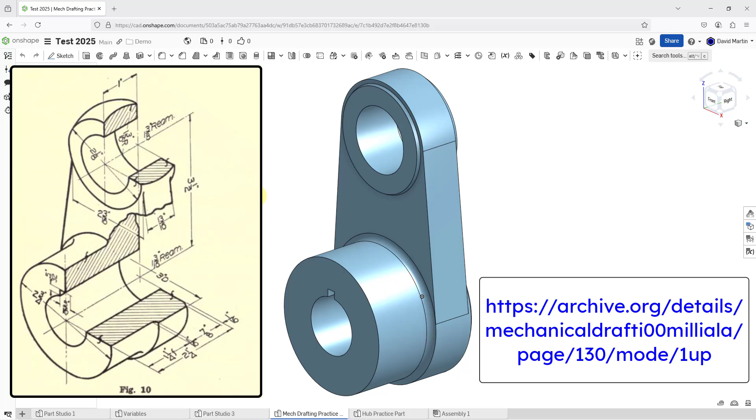Let's take a look at another example of a practice part in Onshape. This one also comes from Mechanical Drafting by Henry Willard Miller, a book written about 1917. It's a little bit more complicated than the previous part that I did. I'm going to do this in two separate videos. I think it'll be pretty long if I do it in one video, and I want to keep this bite-sized and digestible. So anyhow, I'm going to create this part, and I'm just going to work on the two revolve portions in this video.

Let me go back to my Onshape. Let me go to the folder where I want to create it. Let's hit the create button and then document. And this one, I'm going to call this, I don't know, some kind of piston linkage maybe. If you have a better description, please let me know. So I will create the document.

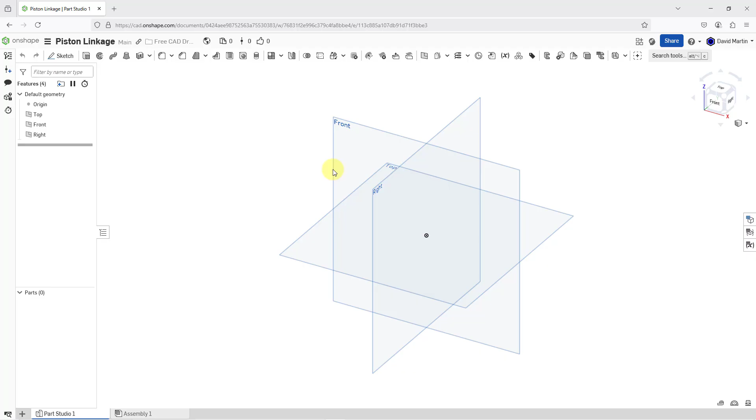And now the first thing I'm going to do is change my units. I'll go to the hamburger and then workspace units and make sure that I am doing this in inches and then hit the green check mark. Okay, and I'm going to do the first sketch for the bottom portion on the plane called right. So let's select right and then hold down the right mouse button and create a new sketch. I always like to view normal to the sketch, which I can get to from the right mouse button.

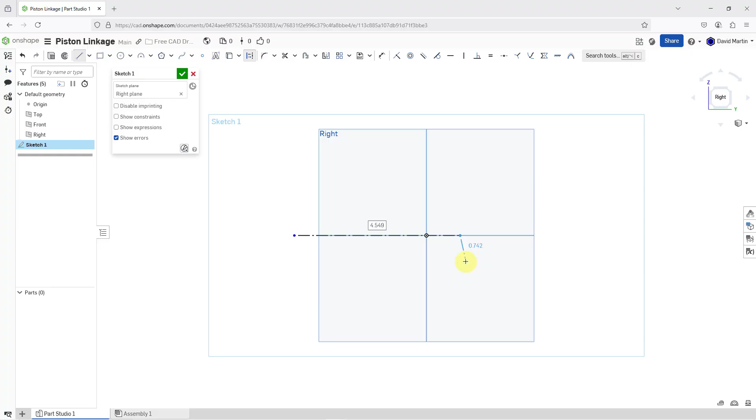And let's start off by making a center line that is horizontal. So I'll go to construction mode and then line. And I'm going to start it out over here and then drag it out and let it go a little past the origin. Then I can hit the escape key. And I'm going to sketch it right down here. And the sketch that I'm doing, I'm going to leave the chamfer and the fillet out of it. I like that to be separate features.

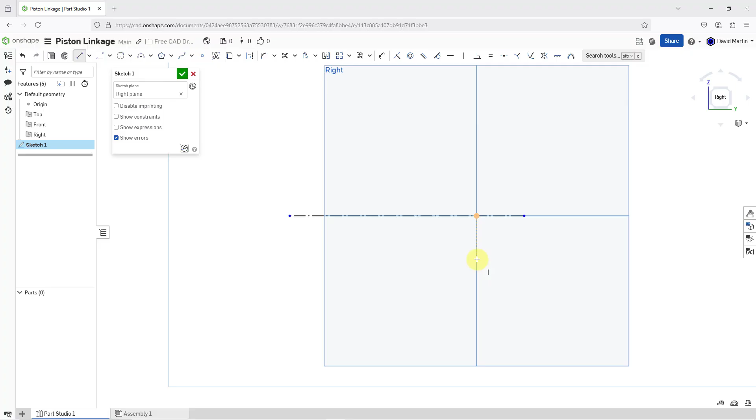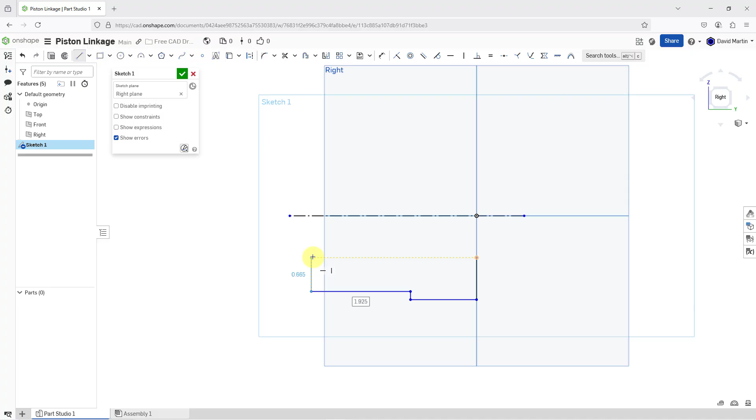So let's create a bunch of lines, and I will start with a vertical line. Let's go from here and then make it about yay big, and then I'm going to make it here, and then for some reason my mouse is having some trouble with when I'm clicking. Let's make the other one about over here and then a vertical line. I'm going to get it to sense the endpoints over on the right, so I just hover my mouse over it, and now let's left click and then close off the sketch, and that is good.

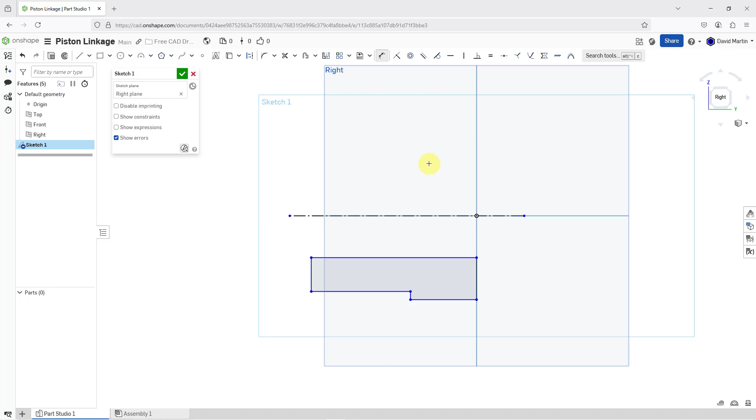So now let's put in some of the different dimensions for this. The first one that I'm going to do, the center hole has a diameter of 1 3/16. So let me click on my axis of revolution and what I want to dimension to and move the mouse out about here. And so that is 1 3/16. That should be 1 point something. Let's just do 1 plus 3 divided by 16. All right, so that's good for the first one. We see our first entity going black.

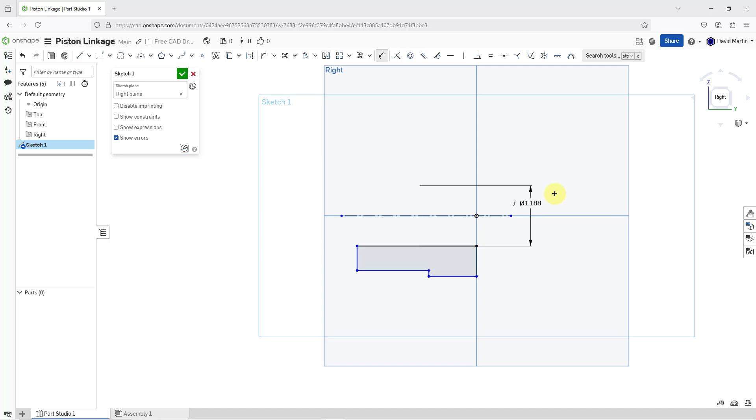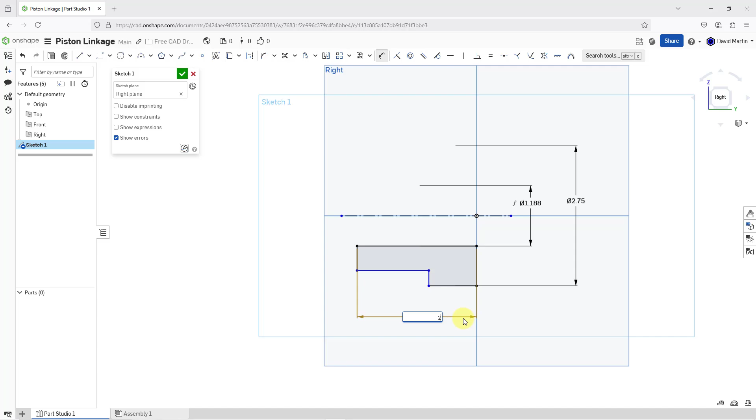And then I can see that the outer diameter of this is 2 3/4. So let's create a dimension from here to here. And let's make it out here. I didn't come as close as I thought. It's 2 3/8 right now. Let's make that 2.75. Hit the enter key. And that gets bigger. And we have the overall width of this is 2.25. Let me pick this and then go over here. Okay, this one was actually pretty good. 2.25, very close. Oh, did I mistype that? 2.25. There we go.

And so again, I'm not going to put the chamfer in here, and I'm not going to put the fillet. And so that means that the length of this line should end up being 1 inch minus 1/16. And this one I can do in my head. This is 0.9375. Hit the enter key.

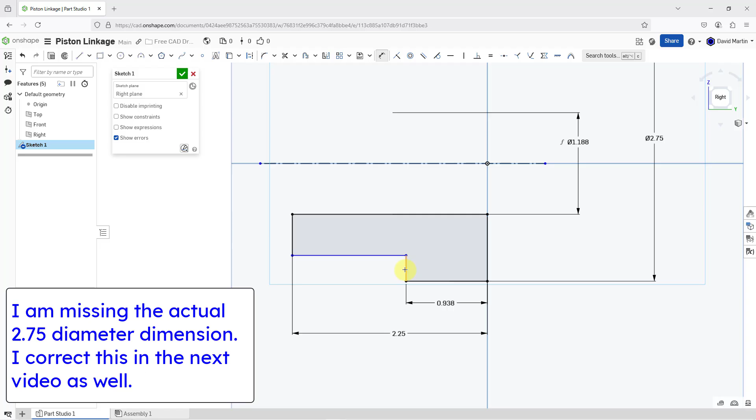And we still have a little bit of blue in here. What is the other dimension that I am looking for? Okay, so based on the fillet, I think this should be 1/16 of an inch. So let's pick this and go out over here. 0.0625. For some reason, I think I'm doing something wrong there, but let's go with that for now. I can always make changes later on. And so everything is black. Everything looks good for this one. So I will hit the check mark.

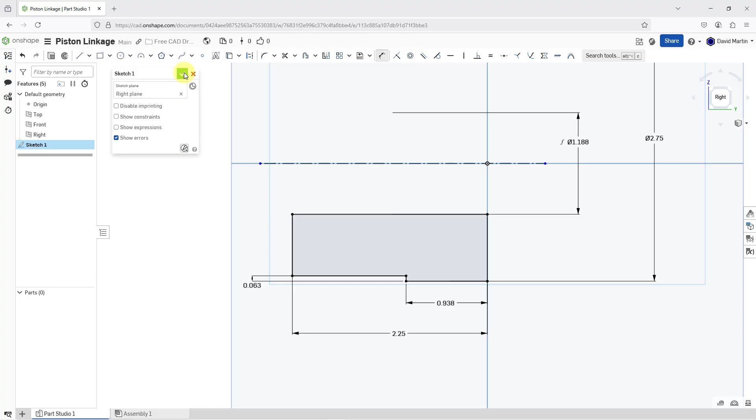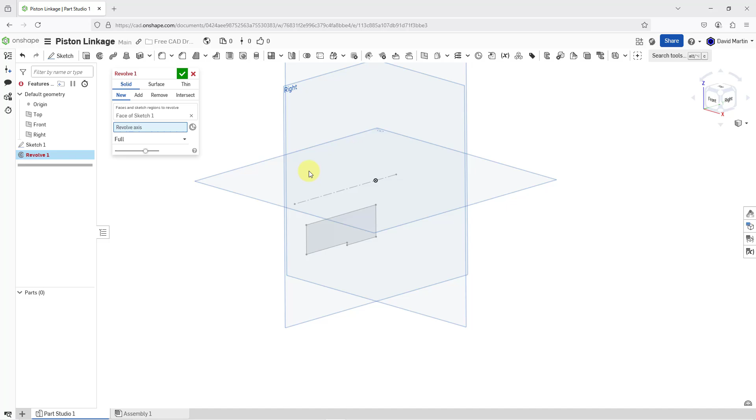And so let's zoom out and rotate the model a little bit. And now let's revolve this. So I will hit on the revolve icon and pick the face of the sketch. Then let's click in the little field for the revolve axis to give it focus. And now I will click on the construction line that I made.

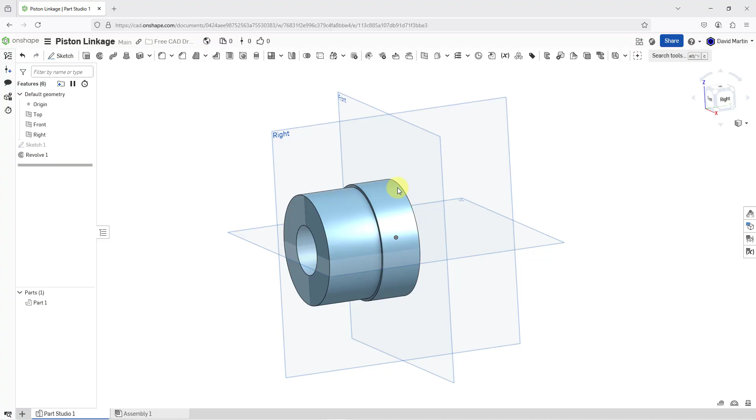And there we can see our first feature in the model. I will hit the check mark, and I didn't put the chamfer or the fillet in this particular sketch. Let me show you what that will eventually look like. I'm not going to keep them in the model just because I like my features to be at the end and I don't want to keep on having to delete them.

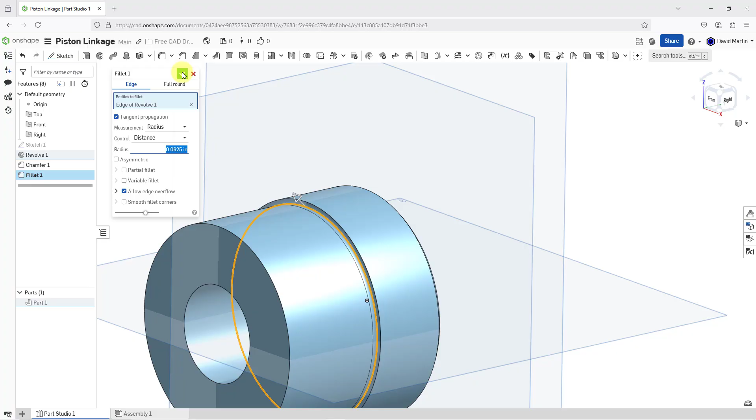And so this chamfer is going to be 0.0625. Let me hit the check mark. And then this fillet will end up being the same value. Let me go to the fillet command and then select that edge. And let's change this to 0.0625, I think. And it makes it smaller. And hit the check mark. And so there you can see the fillet.

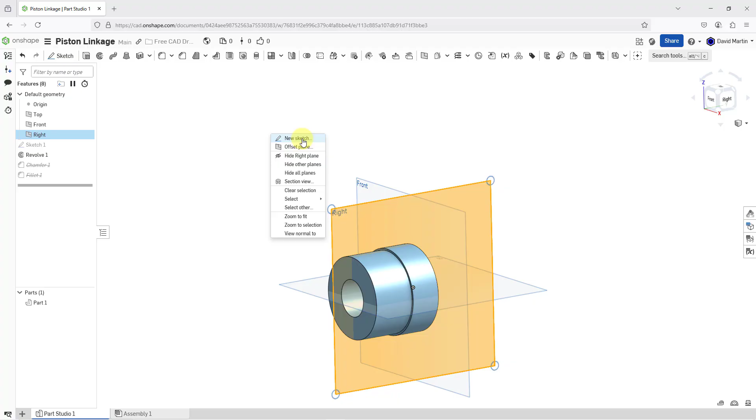But again, I could just suppress them and drag them. Yeah, let me suppress them. And then I can drag them in at the end to where they are supposed to be. Okay, for the second sketch, it is also going to be on the plane called right. So I will select it, hold down the right mouse button and choose New Sketch. And let me hold down the right mouse button again and choose View Normal to Sketch Plane.

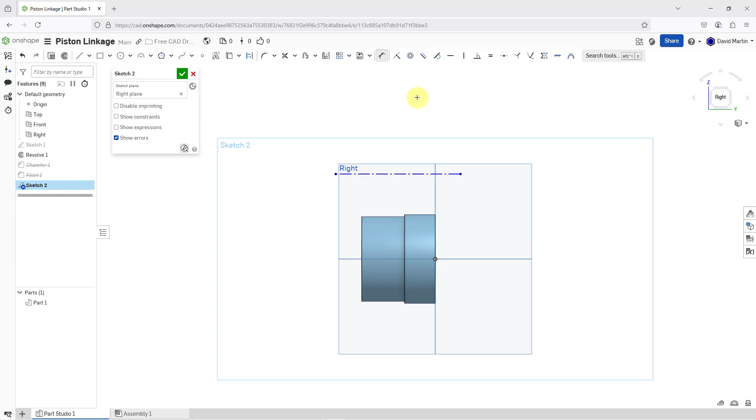And the first thing I'm going to put in is going to be my axis of revolution. So let's go to construction mode. Let me put in a line. And I will start it about over here, and let's make it a little past the origin, and then left click. I will escape to get out of line creation mode. And now let's throw in a dimension for the location of the axis of revolution. Pick those two entities, and this is going to be about 3.5 inches up, 3.5, hit the enter key. So that's good for that.

And now let's do our straight lines in the second sketch. So let me go to the line tool again. I'm going to let it snap into the axis here, and let me left click and make it horizontal, and left click, and then out here about an inch, and then left click and go up, and I'm going to move my mouse over the other endpoint just so that it senses that I want these to be equal lines. So let's hit the escape key.

And the next things that I am going to put in, let's see, we have a dimension for the center bore, and it's 1 3/8. So let's throw that in, dimension, and then pick here and here. And let's get the diameter dimension. And again, that is going to be 1 3/8, 1.375. Hit the enter key.

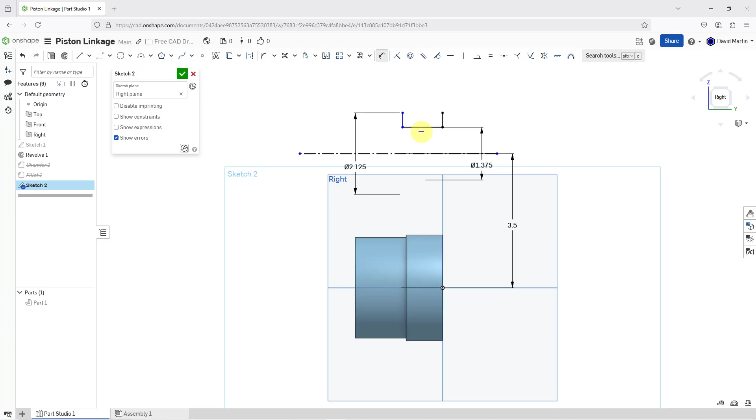And we also have a 2 1/8 inch dimension to the outsides here. So let's go left, left, and then let's get our left click where we want that to be, and that's 2 1/8, so 2.125. And let's see the width of this line. This is going to be 1 inch, so type in 1 there.

And the last thing that's going to be in this sketch is an arc. And so from our arc dropdown, let me choose the 3-point arc. And let's start it here and go over to there. Oops, just about yay big. And now we can dimension this. Go from here in this dimension. This is going to be 1 3/16, which is a little tough to read in the drawing. 1 3/16, I can do that in my head. 1.1875. Hit the enter key, or you could have just typed in 1 plus 3 divided by 16.

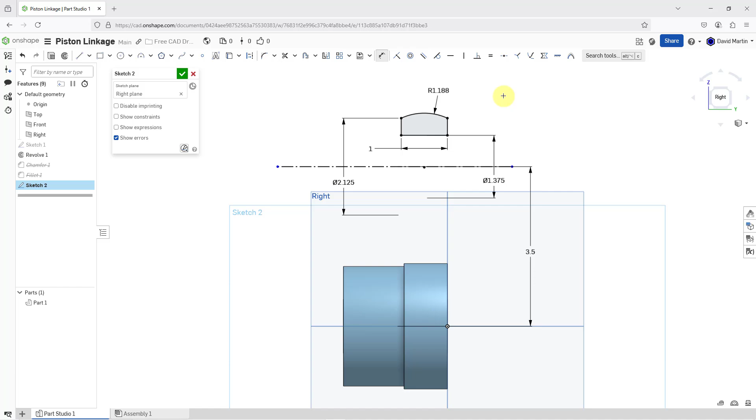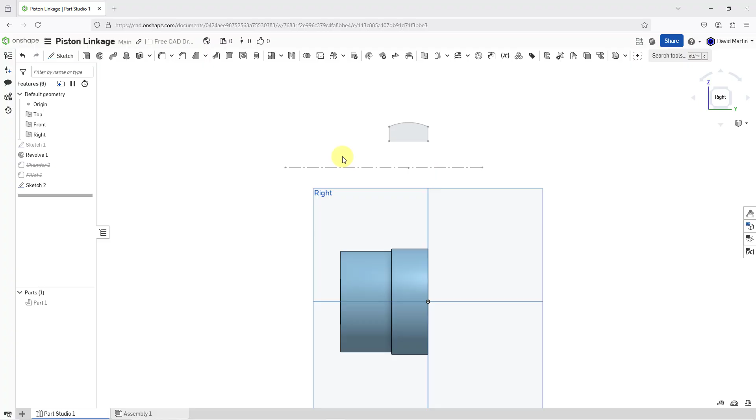And everything is fully dimensioned in here. If you want, we could try putting in a constraint to put that. No, I didn't like that. Over dimension. So let's hit the undo button. And so we're happy with everything just being in black. So let's hit the check mark in order to complete that. Let me hit the P on the keyboard to hide all the planes.

Now we can go to the revolve command once more. Let's pick our face that we want. And then I'll click in here for the revolve axis and pick this. And right now we are getting it in a different color because it's actually going to create a second part. If I try to choose add and say that I want to merge with part one, we're going to get an error because the parts do not intersect or are totally contained.

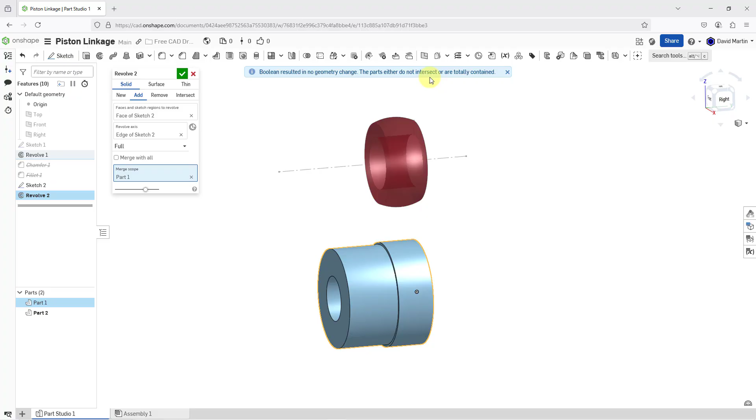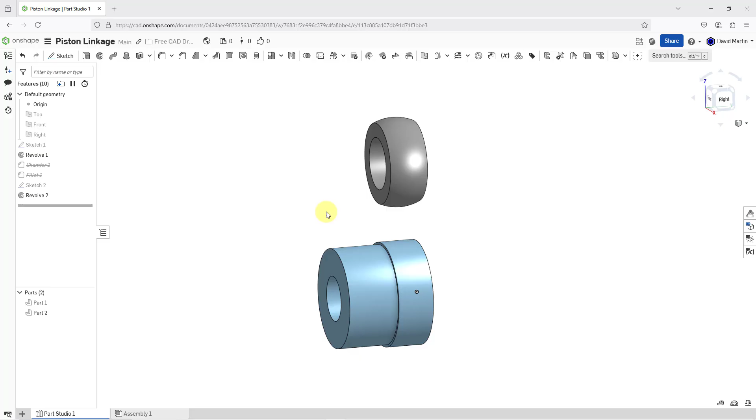So let's just go back to creating a new part. And this will be resolved later on when we create our next extrude. We can merge everything together. So let's hit the check mark to complete that one. And so that's all that I'm going to do in this video. In the next video, we will pick up and create a couple extrudes in order to have the connection between the two revolve sections and also put in the keyway.